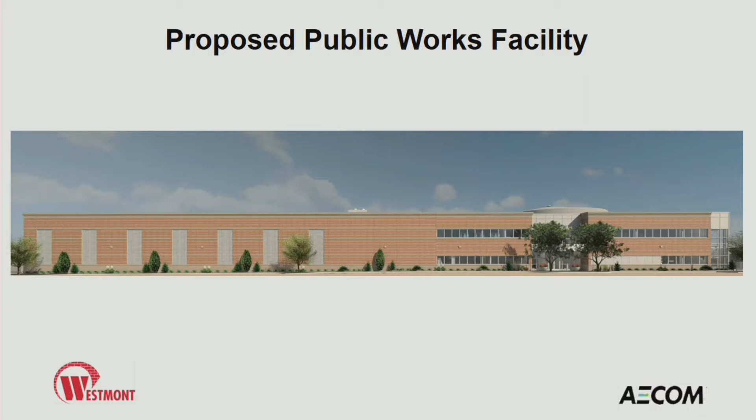So what we're discussing is kind of an expansion or replacement of space for the Public Works Department, and the location is 39 East Burlington Avenue. And so this picture here is just kind of a general concept for the north face of the proposed structure, looking from kind of across the street on Burlington. And as was mentioned, we have requests for a special use permit along with some variances.

The special use permit is based on the property being in the R5 residential zoning location, and basically the whole concept has been to be a positive effect on the community there in the neighborhood. On the left there, you can kind of see the area that we are replacing, and it's used by the current Public Works group along with the Parks Department, and there's just kind of material storage, and you see the existing fence there.

We are proposing some landscaping along Burlington there, along with just I think a better looking building. The one thing additionally is that we're hoping that the size of this building, it's not an imposing thing. We've tried to kind of break up the structure, but being the size that it is, it's also intended to be kind of a screening, a barrier to the railroads behind it, so that the neighborhood, at least with noise and just general activity in the railroad corridor behind there, we're blocking some of that from the neighborhood. So that is mostly what I had on the special use permit.

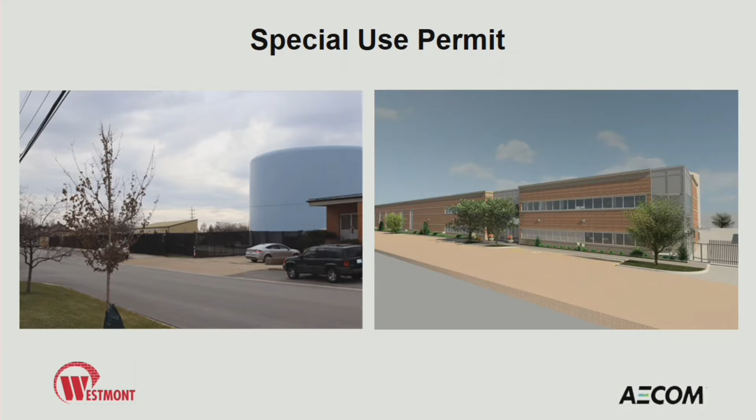For one of the variances, the typical for this residential district would require a 25-foot setback, and really we didn't feel that that was really a possibility in this area due to, one, the location of that water tank behind there, but also if you look at the other buildings along Burlington on the south side there, we're kind of matching the existing look of the street, and that space there is really crucial to maintaining a usable amount of square footage for the building.

I think the building as it is is already a bit of a compromise. I think, in our discussions, we've gotten to a point where we've been able to enclose a lot of the vehicles for the Public Works Department.

It's not all of the vehicles they would like to enclose, but we've gotten a good amount under the roof there. And to lose any more of that space would probably just make the site unworkable for this kind of project. And so then the next variance would be for the height of the fence.

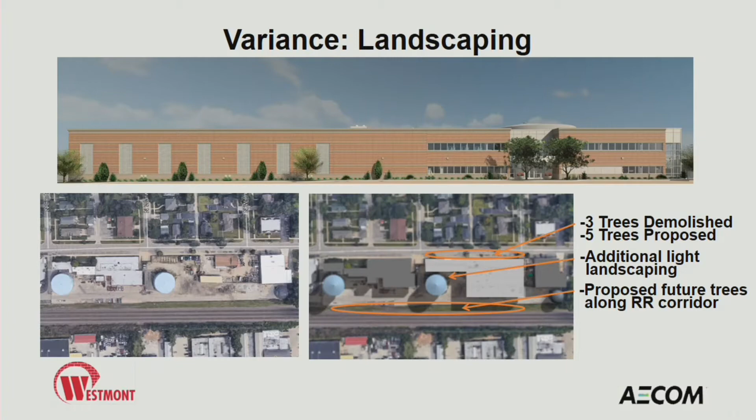Yes, I have several questions and clarifications. On the 10 parking spaces in front, I'm concerned about the streetscape, okay? There's really not a lot of room there as far as green space. Is there any consideration, maybe staff can help with this, that we could consider putting the parking spaces listed on the screen now as the 10 existing spaces on the other side of the street, and increase the ability to get green space in there, or maybe provide the 1 space for ADA, or the UPS guy pulling up to the front door, because that will leave you a whole lot more space to get some green area in there. Because I certainly don't mind walking across the street to go into the Public Works building. Just a thought, maybe it wasn't thought of before.

It was. That's a very good point. We looked at every option, even having parking on the other side, even down in front of the water department. The problem is, if you drive down, there's utility poles all along there. We would have to pay ComEd, Comcast to bury all those utilities if we want to use that as parking. Not to mention there's an alley there.

With the poles, we tried to figure out exactly how many parking spots we could get. We went out there with our village engineer, Noriel, and we marked it off. The most we could get was 6 spots. That's with leaving the utility poles there. Now, if we took the utility poles down, we could get between 10 and 12 more spots, but it just wasn't cost effective to do that.

So we kind of looked into that, but it didn't meet the need that we really were trying to meet here, when we want to get the maximum number of spots we could possibly get for the parking in front of the building. If we went on the other side, we're going to lose 4 to 5 parking spots. Yeah, no, I understand we're gonna lose, but it's something that's a trade-off because of the residential area to the north.

I'm just trying to help maybe look at it from a different perspective, but we have a lot of room in the back, and we don't have that many visitors. So anyway, it's just a thought that maybe if we squeeze 6 and put the other 4 in the back. The bigger concern really is the building. The building is long, the roof line is the same all the way across.

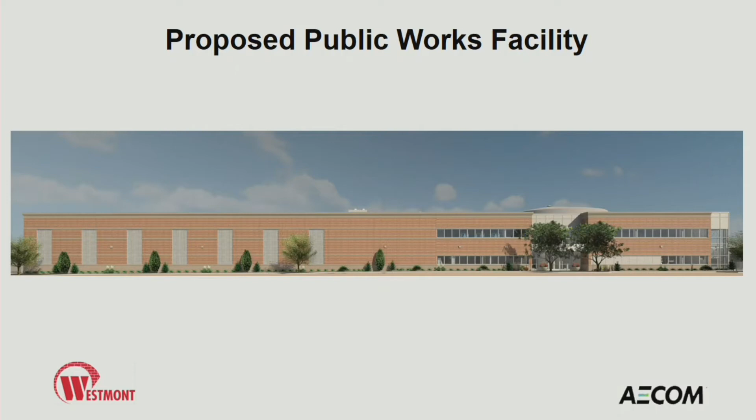Can they go back? Oh, thanks. Yeah, the building will have a striping to kind of break the scale up from the street. Yes, it's a different color.

And then on the eastern side of the building, are those vertical windows going up and down? Is that what I'm looking at, or are they metal panels? Those are windows, but they're translucent windows, so we could break up the facade a little bit. But those are directly into their workspaces. On the first floor, they have shops. The second floor, there's a mezzanine. So one, it brings light into the spaces, but the public can't really see into them or get into them. And it breaks up the building.

Which is exactly my point. So this is a long building. Yeah. And, you know, there's previously been not much there, and I agree, what's there is not very pretty. So this is certainly an increase in aesthetics and beauty. However, this commission has been charged with reviewing plans for many big projects, three of which have just been fenced off in the last week and are getting ready to develop. There are 2 or 3 more coming, and then there are some more in the pipeline.

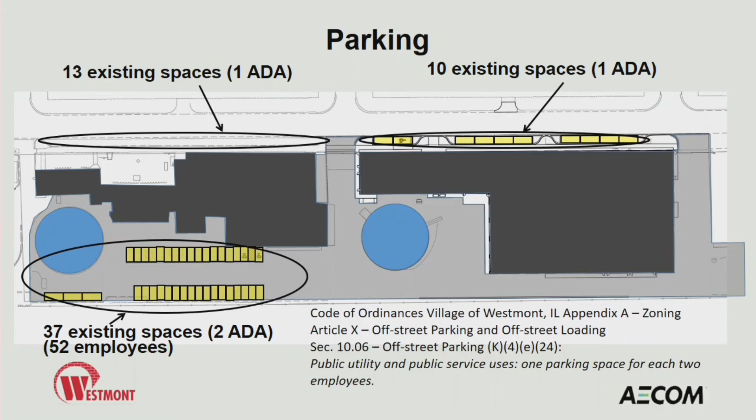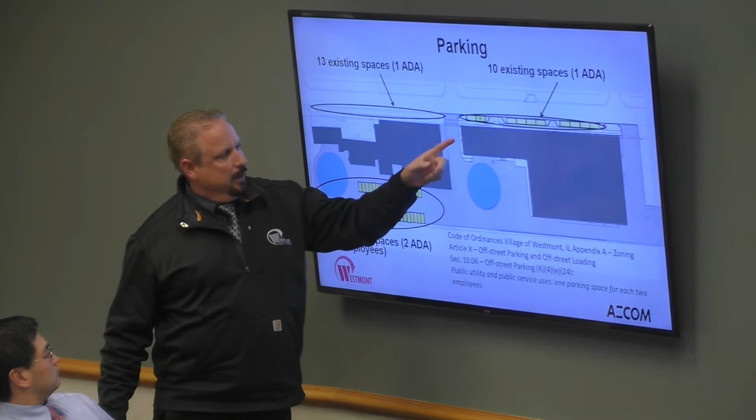Correct, because once that development happens, the S-curves get moved back. So that'll be a street at that point. Correct, this will be a street right here, it'll be part of the S-curve going around like this. So they're going to pull straight in, go through the gate, they'll park here, they'll walk to the building, go into the entry door here. There'll be a time clock that they can punch in right there, go down to their offices, to the garage area, or go upstairs if they're a supervisor or foreman.

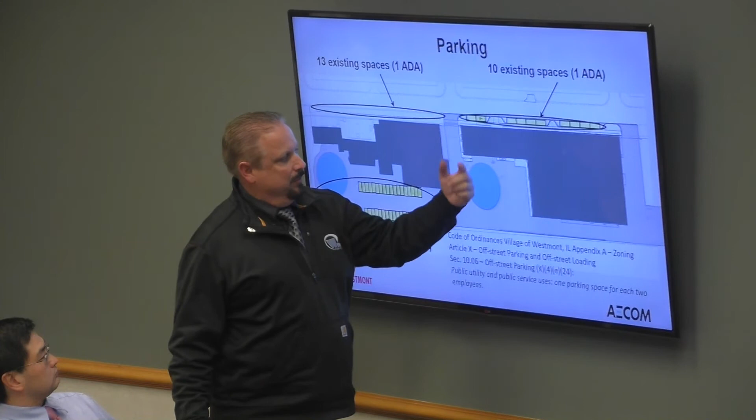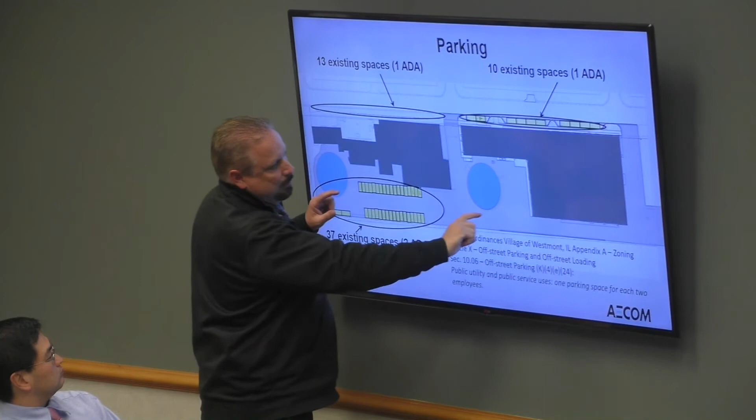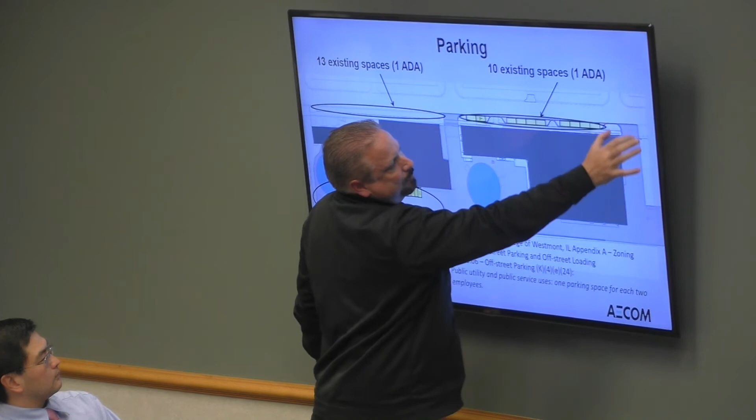Water department, same thing, they'll come in this way, they'll go into the building. Now when they leave at the end of the day, they'll come and get their car and go out this gate, okay? The way the flow works, though, vehicles, dump trucks, equipment will come in, there's a garage door here, they'll come in this way, there's parking stalls going this way on both sides, and they'll come out the gate here and exit out onto Wilmette. These will somewhat line up, it doesn't show it too closely now, but they'll be able to come right out, you can go right down Wilmette or go down Burlington this way. So everything's going to flow west to east.

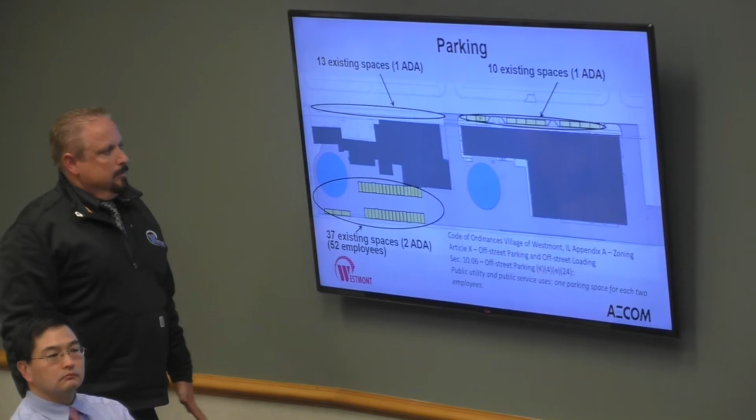Yeah, that makes a lot of sense now. I didn't understand that at first. I sat back there for a while and I was watching. It's amazing how much traffic goes. There's a lot of trucks in and out of there all day long. Wow. So even with the new proposed street alignment, there will still be a west gate in the same place? Yes, there'll be three gates: a gate here, a gate here, and a gate there. Okay. We don't know if that's going to happen. That's correct. Sorry, I was just trying to show them.

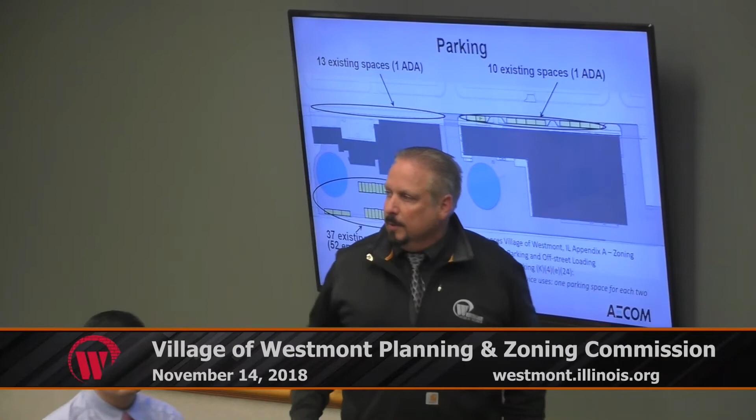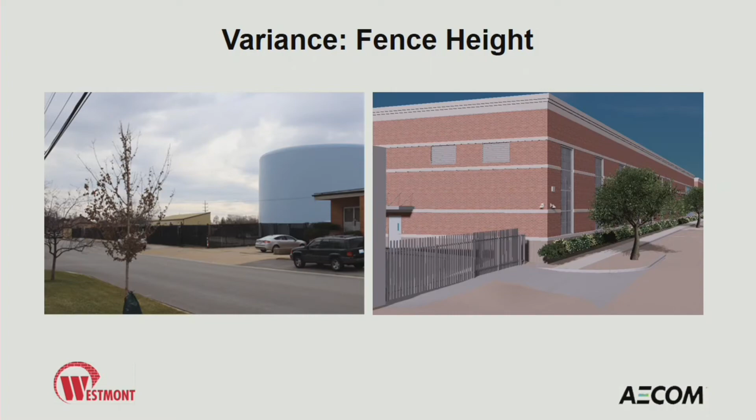The proposed future trees along the railroad right-of-way, why is that future and not part of Phase 1? We're probably gonna get it done before this project's actually done. I'm working with Gary Weber right now to come up with a design. It's in the budget currently as we're speaking. So the idea is to actually do that before this building's even built.

So it'll be done. That's a strong point with me, as you probably know, and I hope that we can see that get cleared and get that done. Yeah, I'm working with Monica at Gary Weber right now. She's trying to work on a design for us to come up with a plan. We're only doing the north side of the tracks for now, because if you go on the south side, over by where Bales Hardware is and the new Park District building, that slope is so steep it's really going to be difficult to come up with a plan, so we're holding off on that side.

But on the north side, from where our property line starts, where our salt dome is, all the way to Cass Avenue, that's all part of that project. Fantastic, happy to hear that. And just so you guys are aware, we're going to work with Clarendon Hills and Downers Grove to try to get some kind of, what's the word I'm trying to think of? Master plan. Yeah, so they all blend together and it all looks normal. And Clarendon Hills is on board. I've talked to their economic development director, and he's excited about this project too.

Currently, on this property that's going to be developed, and/or the water one for a future phase, is any remediation necessary there? So we did do an environmental assessment, and there was nothing definitive that was found. We do have it in the budget for some soils, just little spills and stuff, things like that. That's what we anticipate. And we have some contingency in the budget for that. Okay. That's what's expected.